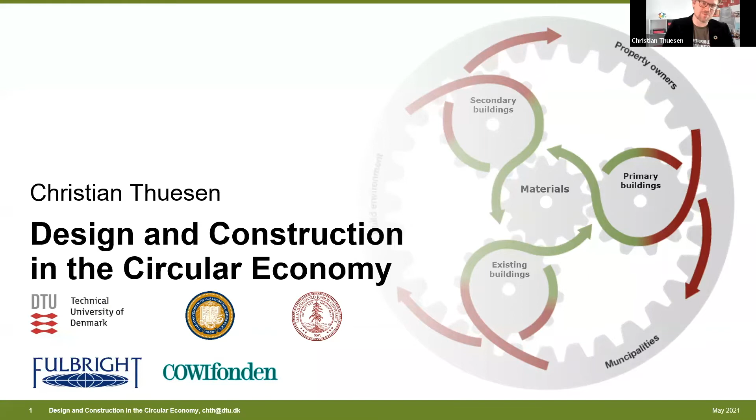So the first question I wanted to ask you is what part of the industry you actually represent. I don't know if you have the polls, Margie. So what does the poll show? Who do we have in the audience?

So half the audience is contractors, and then 30% are architects and engineers. And we've got one client owner and three others. Okay, awesome. So it is a heterogeneous group of people that we have here. That's great.

And we will get back to these roles later on, because that will be the main focus on how these roles are changing or need to change in the light of a circular economy that we're looking into. So the topic of today is actually illustrated in this picture here, in the sense that we are...

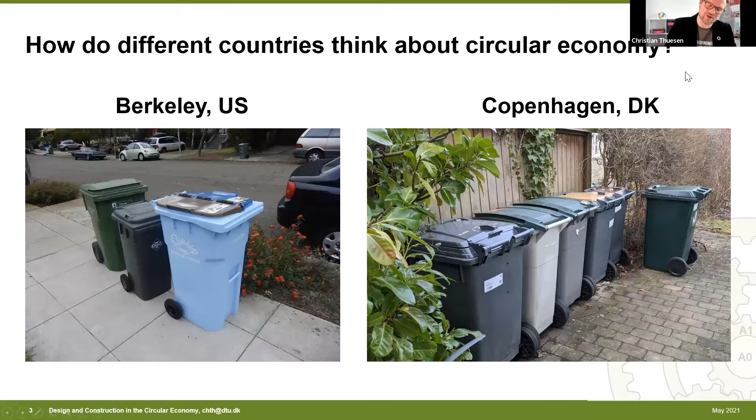So let's explore what America can learn from Denmark. First, I want to give this really interesting case—I'll give a couple of cases throughout the talk today. This is a very famous piece of architecture developed by Bjarke Ingels, one of the most famous architects currently in Denmark, building all around the world.

The problem really is that this has been designed in a way that requires us to produce a lot of garbage that we can burn. However, what has been decided politically in the municipality of Copenhagen is that we want to recycle much more of our garbage, so we don't burn as much, and thus we have a residual amount—we don't really use the capacity in this fantastic piece of equipment. So there's quite a lot of discussion about whether we actually need it. But at least now we have a ski slope in the center of Copenhagen, so we can use it for something.

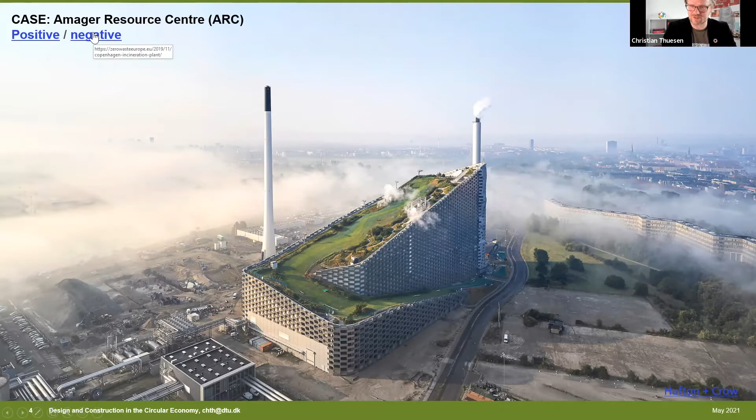And sometimes we also make mistakes, and it is difficult, this transition we're looking into. So in this presentation I want to talk briefly about the societal needs for developing a circular economy—why do we need to think about a circular economy in the first place in construction? Then I want to introduce the idea of circular economy, what it actually is, and the systemic challenge that it represents. And then I want to dive more into how it influences the various parts of the industry.

So what does this mean for policymakers? What does it mean for clients and owners? What does it mean for advisors, architects, engineers, contractors, and material suppliers? I want to give some specific examples and cases for each of these roles. And finally, I want to talk about our new project that is coming up as an illustration of some of the research that we currently are doing together with the industry.

So starting out, I think right now, as Margie also really nicely portrayed here, we are facing a crisis with the COVID pandemic, and that has been all over the place for the past 1.5 years, at least 1 year plus, and this is something that we still will be struggling with. However, there are some other major challenges that we need to address in the coming years, and these are specifically climate change. So we need to flatten the curves, not only for the COVID pandemic, but also in terms of our emissions generally.

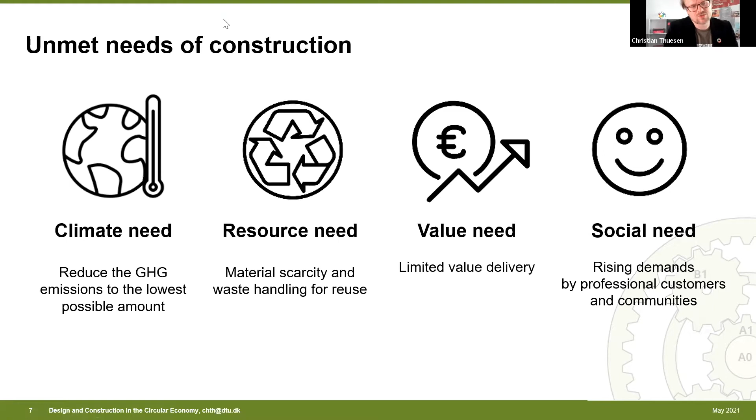Today, I specifically want to talk about the climate need and the resource need and what we can do about it. And the first question I want to ask here, and this is just a question for reflection: considering our planet's capacity, what do you think your budget for CO2 emission is per year? As a person on the planet Earth, how much CO2 are you allowed to emit if everyone should be allowed to emit the same amount?

I think this is the first time I heard this question. This is a new way of viewing it. It's like thinking about it as a bank account. You're only allowed to spend a certain amount of money, a certain amount of emissions. In Denmark, the average emissions from a person is 17 tons a year, metric tons a year. And I expect it to be the same in the US, maybe even more in the US.

The actual threshold is actually 1 ton. So the current way of living in Denmark and the US is not sustainable in terms of the emission of CO2s that we do have currently.

And I want to illustrate this with some of the recent research that we're collaborating with. First of all, there's a group of researchers that has identified what is the CO2 budget per capita, given that we want to fulfill the requirements from the Paris Agreement, and thus right now we have a CO2 budget per capita on around 7 or 8, as generally across the whole planet.

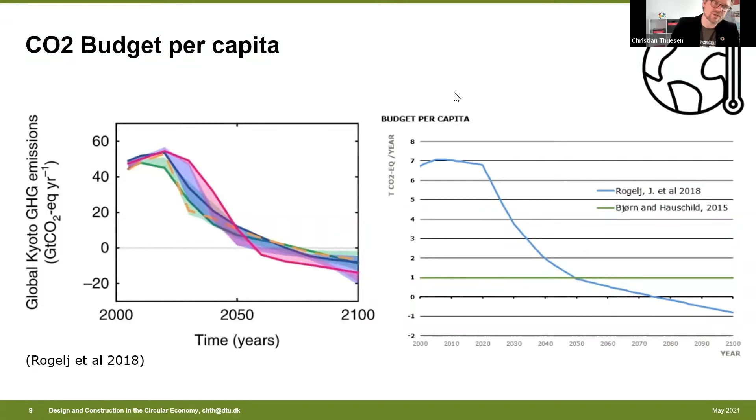The next challenge I want to talk about is the resource challenge. So my question here that you can start reflecting upon is: how much waste in society actually comes from construction? Think about all the waste that you produce as a society. How much do you think actually comes from construction? So the answer to that question is 30%, at least in Europe.

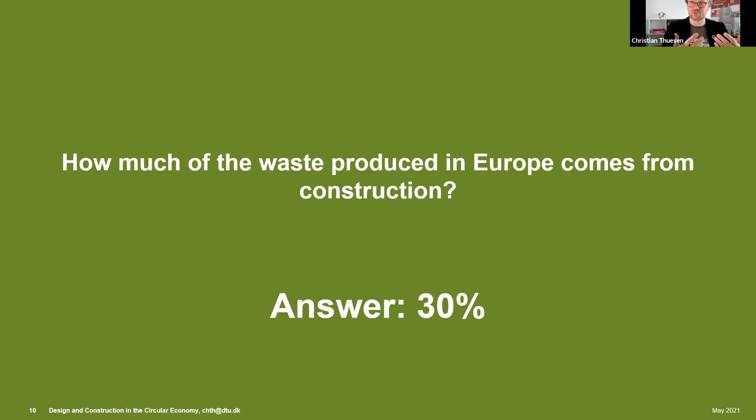So we are, as an industry, really important as producers of waste. We're producing an enormous amount of waste in the industry, and this is documented in two studies. There's a really nice visualization from National Geographic, which basically documents that construction consumes 40% of all materials produced, and then it produces 30% of the waste.

So we are probably the single most important industry in terms of resource consumption, and this is also influential in terms of CO2 emissions, because if we look at the emissions, a lot of them actually come from the production of materials. Construction represents 40%, almost 50%, of the emissions that come from materials. The major reason for this is we use a lot of concrete, which is resulting in a lot of emissions.

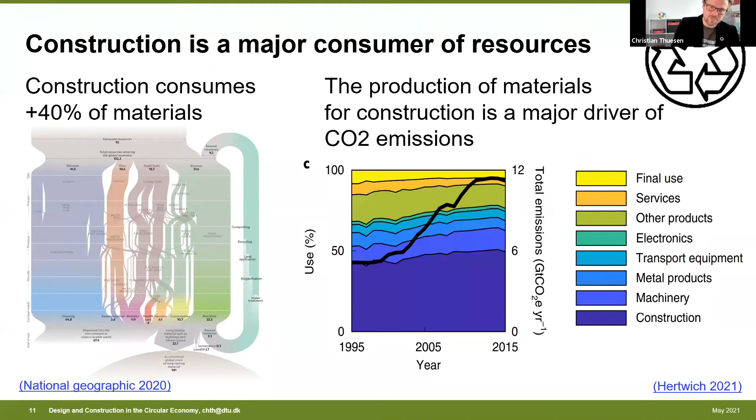So construction is really a major player in terms of consuming resources. Another element that I think is interesting is that the resources we have on the planet — if you start thinking about it, the only thing that is not scarce or not finite is the sun that hits the planet all the time. But in terms of all the materials, there's only a certain amount of materials on planet Earth.

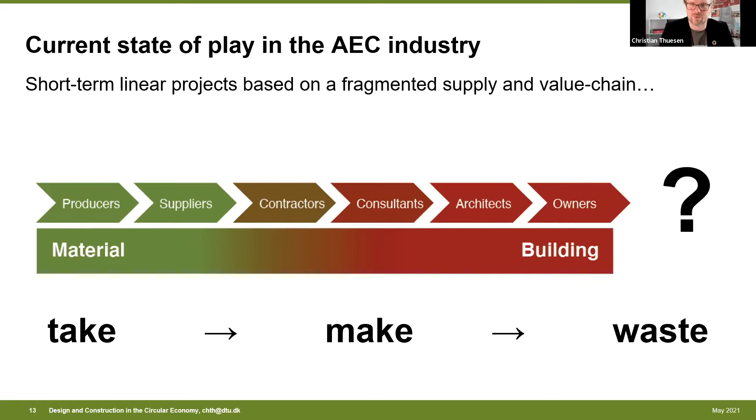And this is basically the idea of the circular economy. How can we close the loop? How can we make sure that it's not a one-way street in terms of the value chain? How can we reverse the value chain?

How can we recirculate the materials? So after we have the production, the building process, the use phase, the end of life — instead of just having all the materials end up at landfills, how can we make sure that we are recycling the materials into the industry again? This is a very nice graph that basically documents how we would like it to be. The challenge really is, it is not as simple as that.

And the reason for this is because whenever we have some waste, we have different quality of waste. We can do different things with waste. There's the possibility to reduce the amount of waste we have. We can reuse the waste, we can recycle, we can recover, and we can dispose. The point is that in order to maintain the highest value of the materials, we want to recycle at the highest possible level, so that the least amount of materials actually gets disposed.

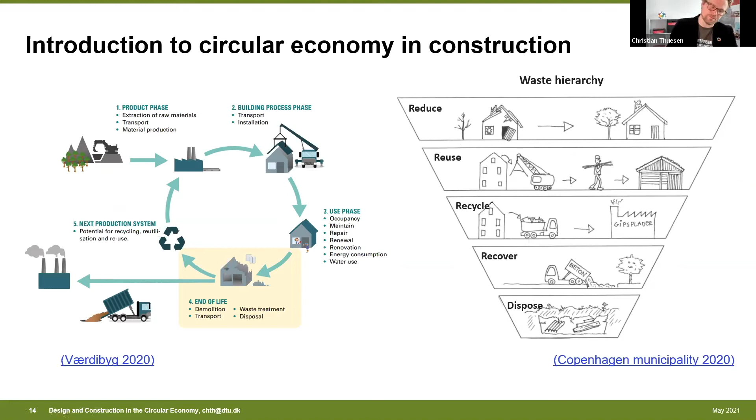And that's the idea of this waste hierarchy. I'll get back to this a bit later, because this is a major challenge.

Okay, so now I want to make another poll, Margie, because I would like to know who in the AEC industry can contribute the most to moving the needle towards circularity. What are the roles that can actually make the most difference here? I've put that in the chat box because I think it would be interesting for people to add a word as to why. The poll feature on Zoom doesn't allow me to get that feedback, but I think it would be interesting to see why you think one particular group over another.

So think about who would actually be the most influential in actually driving this agenda?

Laura says owners initiate the demand. Yes, absolutely - owners, owners, owners. Could that be because we don't have so many owners on the call? I'm just saying, I wonder what would the owner say? Policymakers - it trickles down from the top. Former owner here. Material suppliers. Yes, fantastic. I think you're definitely onto something here, and we cannot do this without the owners.

But whenever you need to build something, you need to make sure that there is someone who can do this. So it's always this kind of intricate balance between the supply side and the demand side, right? Obviously there needs to be a market, but the market can also be shaped in various ways. So let's have a look at how this can be done.

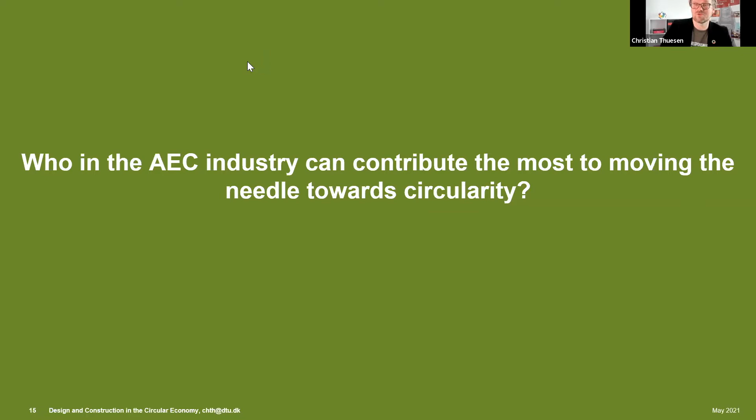Given that we want to move the construction industry into a circular economy, what kind of implications does it have for the construction businesses and the central actors in the industry? As documented in your chat, it is somehow a balance between the clients and builders - the client requiring the buildings, and the supply chain supplying it - need to be aligned in terms of priorities and their capabilities. Can they actually deliver what the clients want?

There's several elements essential here. One of them is that working with circular economy really requires a long-term focus. We need to understand the way we build in a different way, and we need to acknowledge that the buildings we build are literally standing for hundreds of years. So we need a different focus, and I think that challenges the very short-term oriented industry.

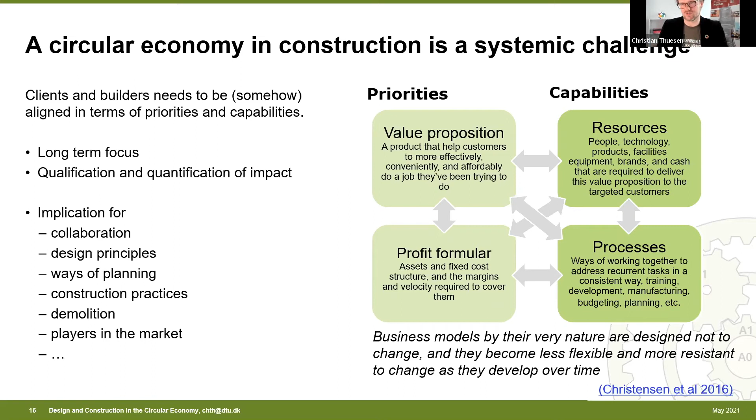So I'm just looking at the priorities - what is the orientation of the company - and the capabilities, in terms of what type of resources and processes does the company need to work with in order to get to where it wants.

Let's start with the top. What's the role of the policymakers? I just wonder - I'm sure you know this - what is President Biden's pledge to reduce CO2 emissions by 2030? I'm sure you know this. The answer is 50%. Isn't that right, Margie?

Yeah, I don't know exactly, but I think that sounds correct. And I know you had a different president a year ago, and this has changed dramatically. We just welcome you back into the international community in that sense, because we have been missing you.

If we want to understand the policy dimension, I think in a Danish context, we have to start with the Paris Agreement in 2015. Right now, we look at, this is further addressed in policy initiatives at European level and at the Danish level.

At the European level, we now have a reduction target of 55%, and they have developed a circular economy action plan for a cleaner and more competitive Europe. So this is part of the European initiatives, and that's on the general European level.

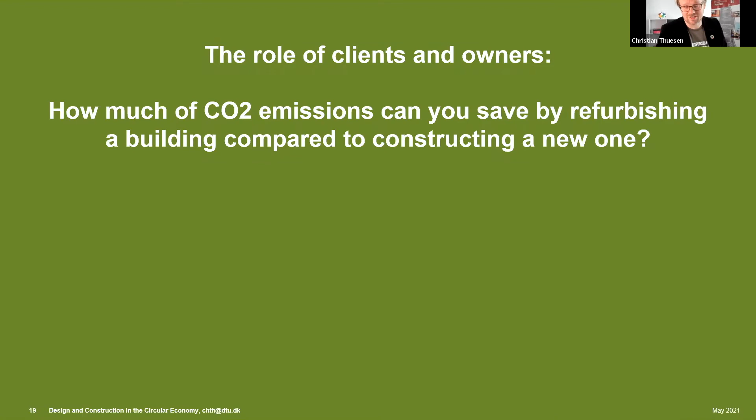But a case study from Denmark shows that it's 50 times less CO2 emissions in renovations. So if you're refurbishing your building, you're much better off in terms of CO2 emissions than if you are just tearing it down and building something up again.

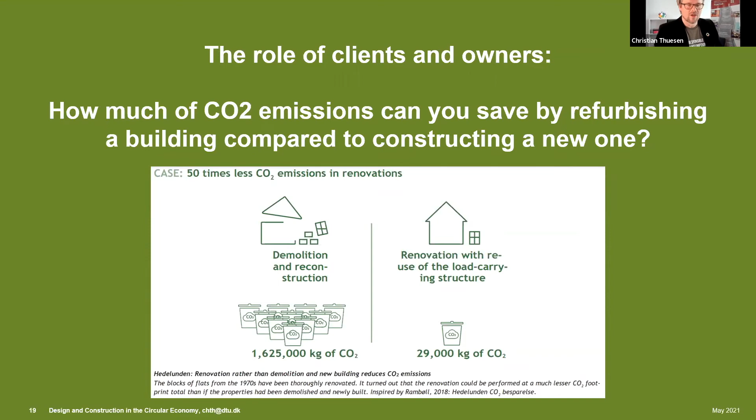So renovations becomes much more important. And if we look at this, as a client, it has consequences for the priorities. We need to be much more focused on refurbishment of the existing building stock. It doesn't mean we're not allowed to build anything new, but refurbishment of existing buildings is going to be a major thing in the future.

But that also requires new capabilities. We need to be much more professional in the way we do facilities management. We need to think about how we tender practice for circular solutions, and how we put requirements on future buildings. So can they be flexible, so we don't need to tear them down again in the future if we want to use it for something else? And make sure that whenever someone's building for us, it can be disassembled, it can be repaired, and it can be maintained.

As an illustration of this, we've had a rather big innovation partnership in the Danish industry with a lot of major companies and universities in terms of renovating buildings sustainably. There's a lot of features within this project. One of the initiatives was the development of an industrialized facade element where you can refurbish these houses from the 60s and 70s without having the tenants move out.

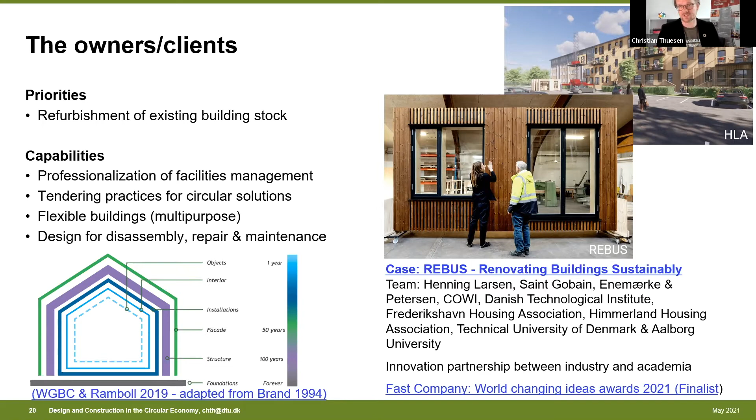Okay, so what is the role of the advisors, the architects and engineers? And here the question is, what is the global warming potential for steel and cross-laminated timber? I know these are both elements that are extremely important in the US.

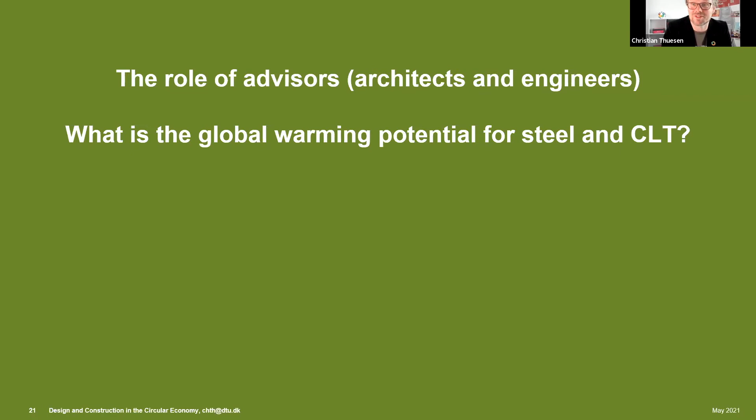Yes, so it is obviously different. The global warming potential for steel is way higher, so it's positive - whenever you're using steel, you are contributing to the emission of greenhouse gases. But if you're using cross-laminated timber, you're actually not contributing to greenhouse gases because the CO2 is embedded in the material. So in that sense, it's much better to use cross-laminated timber compared to steel.

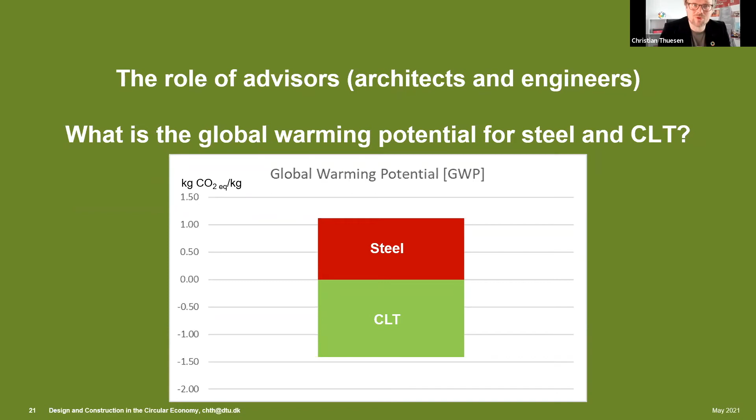However, that requires the assumption that you're not burning that material or the wood afterwards. So if you're taking the building apart in 50 years, you need to make sure you're not just burning that material, because then it just turns into zero. The choice of materials is extremely important in terms of how you design your buildings.

In order to address this, and again in terms of priorities for engineers and architects, we need to focus on going from new build to refurbishment, and we can do this in many different ways. One example is from 3XN, one of our partner companies, an architect - the Quay Quarter Tower in Sydney, where they are basically designing a skyscraper where the design incorporates two thirds of an existing structure of a building.

You can do this in many different ways. And in terms of the capabilities, that is all about resource surveying - identifying what type of resources are actually present in a building, design for disassembly, material selection, LCC - life cycle cost, and life cycle assessment is obviously important.

Here's specifically a really nice feature from Denmark, the material pyramid. You probably know the food pyramid from the 80s. A couple of years ago, they developed one for building materials. The basic idea is that you only want to use the materials on the bottom of the pyramid, because they are the ones having the least amount of emission. Have a look at this - this is one of the resources that is available.

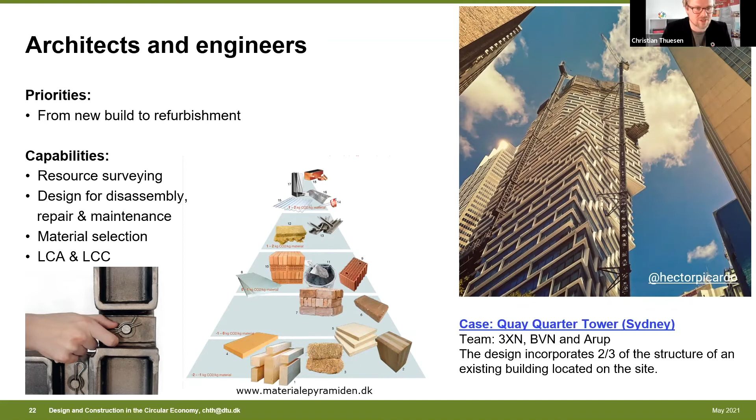Let's have a look at the contractors. So the question here is, how much of the materials that a contractor buys could come from recycled materials? Think about contractors - they buy an enormous amount of material. And how much of this material can actually come from recycled materials?

The answer to this question is approximately 30% under current circumstances, because it's not like whenever you're demolishing a building you can just use all the parts of it, because there might be toxic substances in some of the buildings that were built in the past. So it's not like we can use everything we have available. A recent study, actually done by some of my students, identified that it's just approximately 30% under current circumstances. We might change that afterwards.

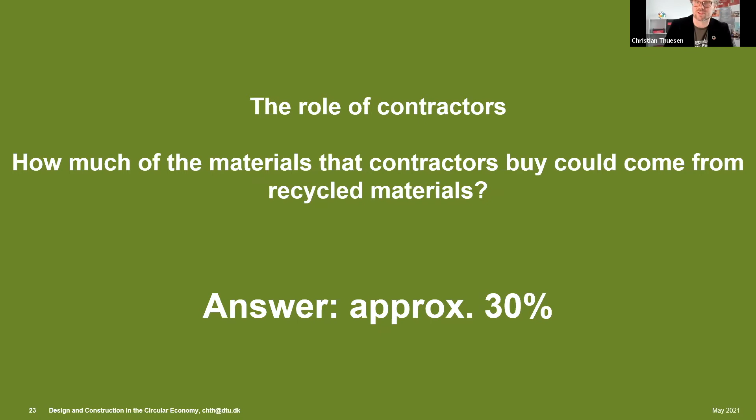Contractors' priorities are obviously also focusing on refurbishment. A lot of contractors in Denmark are actually focused on new construction, but the ones really running with a lot of the projects right now in Denmark are actually the ones that have a very strong emphasis on refurbishment.

As a contractor, the point here is that you want the capabilities. You want to make sure that you can source the materials, you can source the secondary materials, and you're able to handle them. You can work with the recyclability of the materials, so whenever you're taking buildings down, they can be recycled at the highest possible level.

Another feature that I think is really interesting, if you start thinking about the resource side from a contractor perspective: traditionally the contractor perspective has been very much focused on handling human resources in order to do the projects. But now we're actually looking into a situation where contractors should also look at the availability of materials. Whenever they're refurbishing a project, that might also represent a source of materials for other projects across the portfolio that they do. As a contractor, they might actually make an offer on a project that doesn't make economical sense from a human side, but makes a lot of sense from the material side. So it creates another layer of complexity to the contractor side that I think is really going to be interesting.

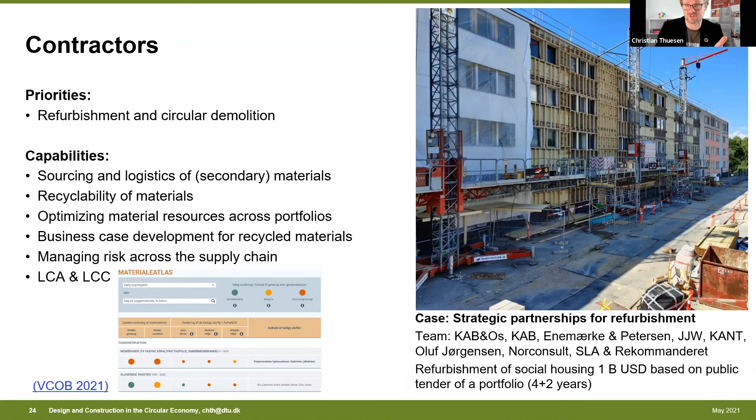I want to mention this material atlas, which is an important feature in Denmark. Whenever you want to recycle something, this atlas gives you information about whether a building is constructed from a certain period, and what materials it probably consists of, and thus what substances those materials probably have. Then they basically evaluate the recyclability of this material - can we actually reuse it, or should we dispose of it because it might have toxic substances? We have a huge database for this.

Finally, I want to talk about the material suppliers. The question here is, how much of the current waste that comes from construction is currently recycled? Recall the waste hierarchy - recyclers want to recycle at the highest possible level, meaning you use it for something very close to its original purpose. Take concrete, for example: how much of the current waste is currently recycled? It's actually not that much, less than 5%. That's because it is just recovered - a lot of the concrete waste is crushed down and then used not for landfill, but for road fillings.

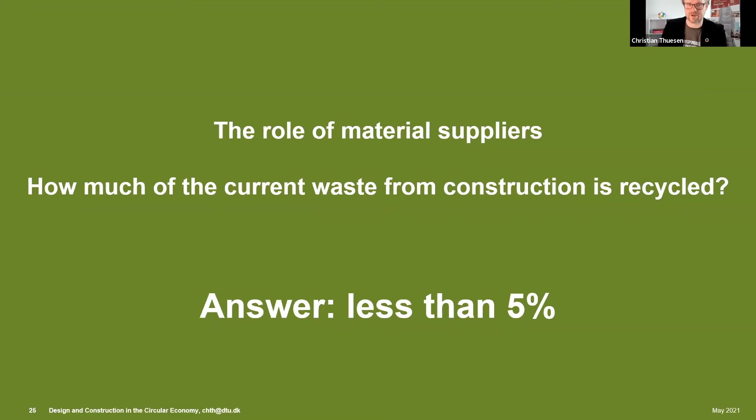The material suppliers - I've taken this case here. First of all, we have the traditional material suppliers. They need to integrate secondary materials into the production of new materials. But the primary case I want to focus on is a new business we haven't really looked at in the industry as of today, and that is the waste handler. Because the waste handlers literally have access to a ton of materials, and they have to move away from being just a handler of waste to being a supplier of secondary materials.

But this also requires a huge transformation on their side. They need to reverse the supply chain, and they need to work with a different type of production planning - pull-based planning instead of just push-based planning, which is what they have used so far.

They need to be working much more consistently with different levels of materials. There's a very good case on this where they use concrete as a circular resource in Denmark. This company, RGS Nordic, receives 300,000 tons of demolished concrete every year. I did the numbers yesterday, and 300,000 tons is twice the size of the Salesforce Tower and half of the Golden Gate Bridge. So it's quite a lot of material they receive every year, and if we can increase the reusability of this material, we are far better off.

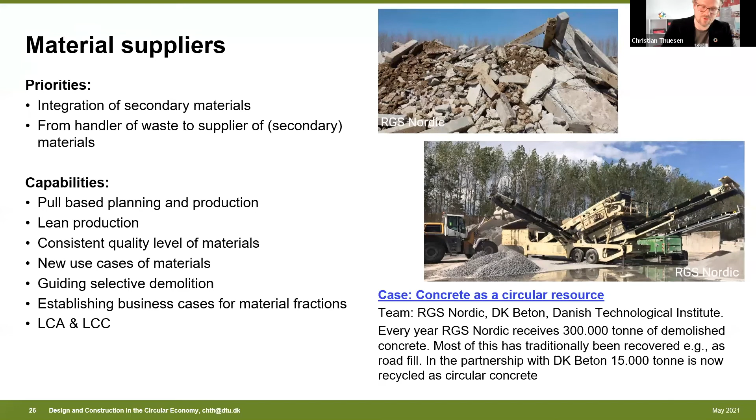Okay, time is flying, Margie. I wanted to talk briefly about our own project here towards the end, because I think we'd also like to have some questions. So I want to briefly talk about our own project, and then we can take a few questions. Very quickly, yes.

So what we actually try to do now is connect the partners of the industry in what we term platforms of circular construction. The idea is that we want to create platforms around the materials, existing buildings, primary buildings, and secondary buildings. Our purpose is to accelerate the transformation of the construction sector towards circularity based on these platforms.

The reason we use platforms is because we know from other industries—and I think you're actually very far ahead in America on this agenda—that platforms are very good at managing complexity, and that's a key feature for addressing this circularity challenge. It's also an efficient way to establish learning practices, to learn from project to project, and finally, it's scalable. So this is our idea for the future, and there are a couple more slides that dive into the specific ideas.

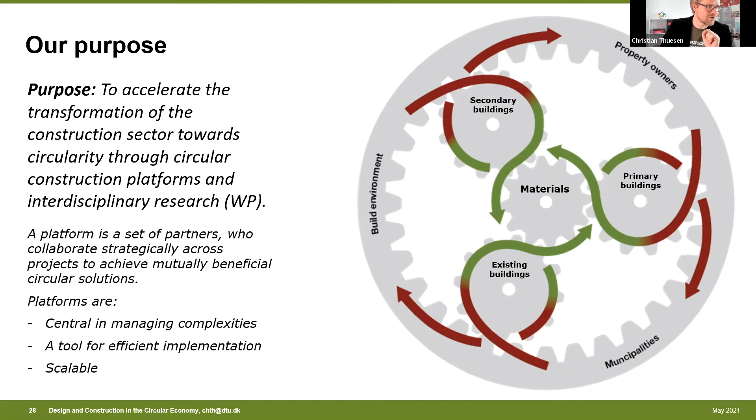I don't want to go too much into detail with this, but the general ambition is that based on systematically developing platforms for circular construction, we will be able to make a substantial impact in the future in terms of the climate, resource value, and social needs of construction. So that's it.

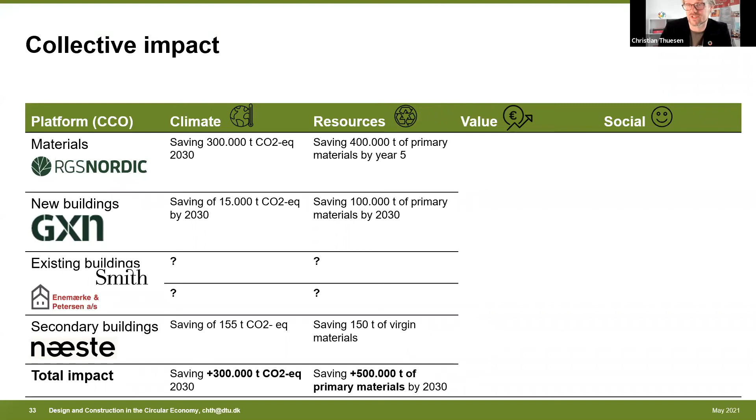Yes, I wonder if there's a few questions. So Monica asks about who administers the material atlas. Is it specific only to Denmark, or is it through the EU? How is that, and is it a matrix other countries could absorb? You might want to stop—well, actually, keep the screen sharing up for a little while, perhaps, and then we'll get back to just looking at you. Okay, should I just stop the screen? Sure, that's good, yeah, okay.

Yes, I think that's a good question. The material atlas that we have here in Denmark is developed in Denmark, but I know there's a lot of development going on at the European level to establish a common database across European countries. There are so many initiatives on the circular agenda in Denmark and Europe, so I've only been able to portray a few of them in the presentation today, but there are a ton of other activities as well. Also, an element I really haven't covered is the city level, which is another major area. There is a link to this material atlas, but the problem is that the material atlas is in Danish right now. I'll try to see if I can find an English version, but the rest of the link should actually link directly to English-based resources.